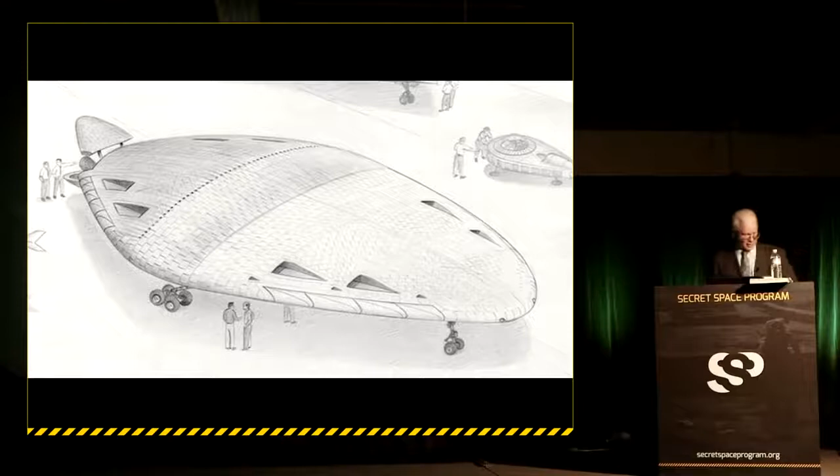Louder, please. Okay. Let's see here. Move this up a little bit. There we go. Is that good? Okay. Can you hear me now?

Okay. This is the first generation Aurora. It was a remotely piloted vehicle. It was built by Lockheed Martin. And this object you can see in the distance was actually taken from a Polaroid photograph that was taken in 1984 near Cedarville, California, up in the northeast corner of the state.

Now, this is one of the other vehicles here. This is a drawing put together by my friend Michael Schratt. This particular vehicle I'll go into a little bit as well. It was a part of a crash recovery in East Germany.

Now, after I got out of high school, I realized that in order to go to the... Okay, there we go. Sorry about that.

One of the things I was going to need to be able to do in order to go to the college I wanted to go to, which was a place called Art Center College of Design in Pasadena. I wanted to design cars for General Motors, and this was the premier college that all the designers would go to. And at $2 an hour minimum wage at the time, I knew that there was simply no way that I could afford to save up the money to go there. So I decided to join the Air Force and get the GI Bill to help pay for my college education.

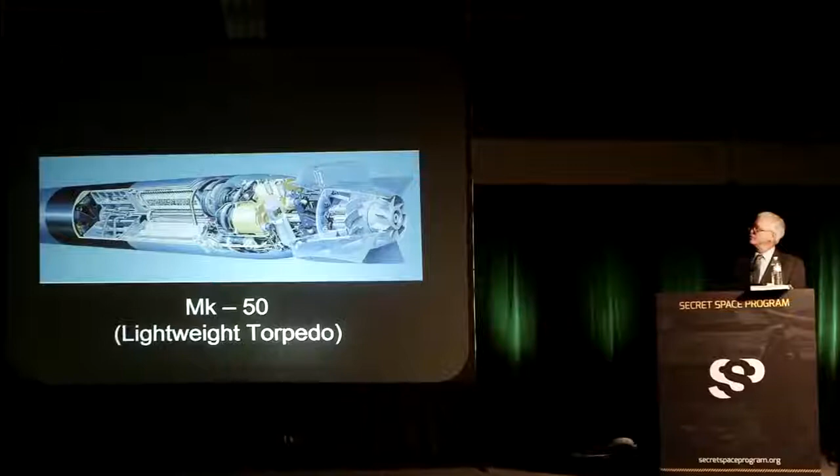This is a cutaway illustration of a propulsion system for a lightweight torpedo that basically involves a lithium core that is ignited once it drops into the water. And this heats up an oxidizer, flows through here, it creates steam, high temperature steam through these heat exchanging tubes here, goes through a transmission, drives a generator, and also a couple of counter-rotating props in the back.

But being able to figure all that stuff out, and I take a lot of pride in the accuracy of my work, involved a certain amount of engineering. And even though I'm not an engineer, I don't have an engineering degree, I spent an awful lot of time studying how things are put together, how they work, what makes them function, what the physics and the engineering are behind these systems.

But eventually, while I was working in the industry, I actually had the opportunity to make contact with a lot of people in the military, some of whom expressed an interest in having some of my artwork in their squadron ready rooms. And so I was actually able to arrange to get what are called media orientation rides and go up in these planes and see how the pilots handle the stress of flying.

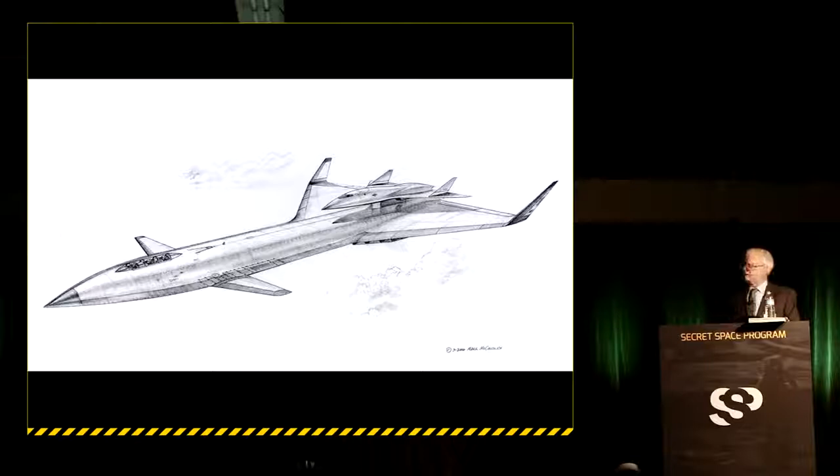It turns out that shortly after I submitted a sketch of this particular aircraft, they decided that they were just going to completely scrap that. And so I wound up doing an illustration of an aircraft something like this. There was one proposal where it might actually be possible to deploy this particular aircraft right out of the back end of a flying C-5A Galaxy. And this is sort of my conceptualizing of how many you could actually fit into a C-5, knowing what the size of this aircraft was.

It had a scramjet nacelle on the ventral surface, and it also had one on top. This particular version only had one underneath. And because of the shape of the aircraft, it made it very peculiar, or very sort of awkward, where the landing gear would come out in order for this thing to work properly.

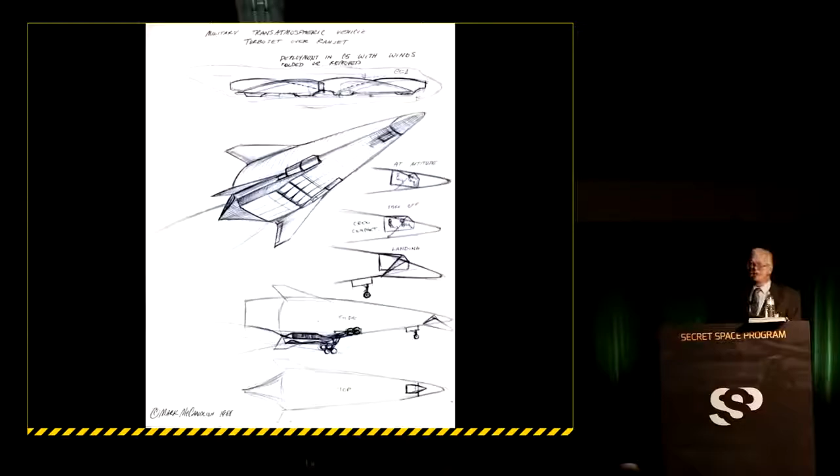Now, about the same time, there was a lot of talk about a crash, an aircraft vehicle crash that had occurred somewhere near Barstow, California. And there were some people that were describing different features of the aircraft. There was a fellow that I met and talked with who was friends with a number of the astronauts, and they were describing how there was a particular astronaut flying a Learjet, ferrying it from one location to another through the state of Nevada.

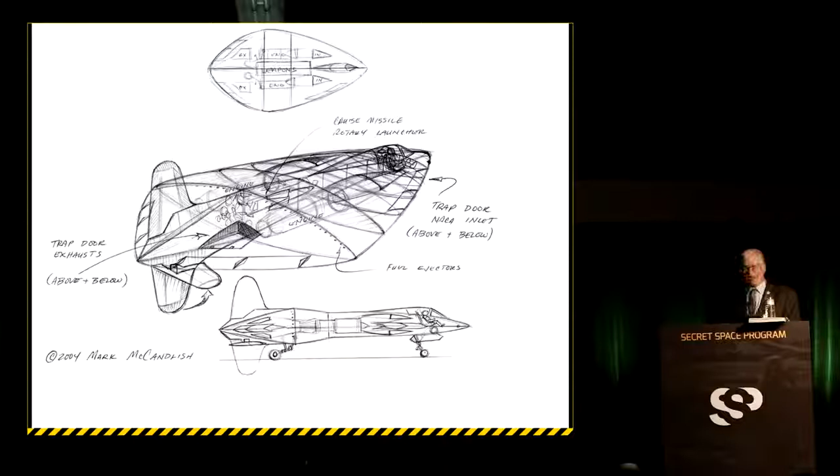And he came out of the clouds and he found himself sitting slightly above and behind an aircraft that looked just like this. Now, the interesting thing about this aircraft is that it had some very strange features. It had engines that were buried inside the fuselage with sort of a NACA duct-shaped inlet there. There was kind of a slot in the back. It looked like there was maybe a trap door, control surfaces along the bottom, exhaust diffusion.

But it also had this very interesting feature, and most people don't know this, that the predecessor of the SR-71 Blackbird, the YF-12A, which was kind of a strategic aircraft used for missile delivery, it also had a folding ventral vertical stabilizer, or tail as you would call it. And so this aircraft obviously had that same particular feature. The vehicle was all black, or sort of a deep gray.

And as the pilot was flying along, looking at this thing flying through the clouds, he suddenly realized that if he had not seen this thing directly, he might have collided with it as they were flying through the clouds together. So he gets on the radio to his ground control people and says, I've got some traffic up here, why didn't you warn me? And they said, well, there isn't any traffic up there. And he says, well, of course there is, I'm looking right at it. It's black, shaped like a flattened out football shape, no wings to speak of, two tails, one above, one below.

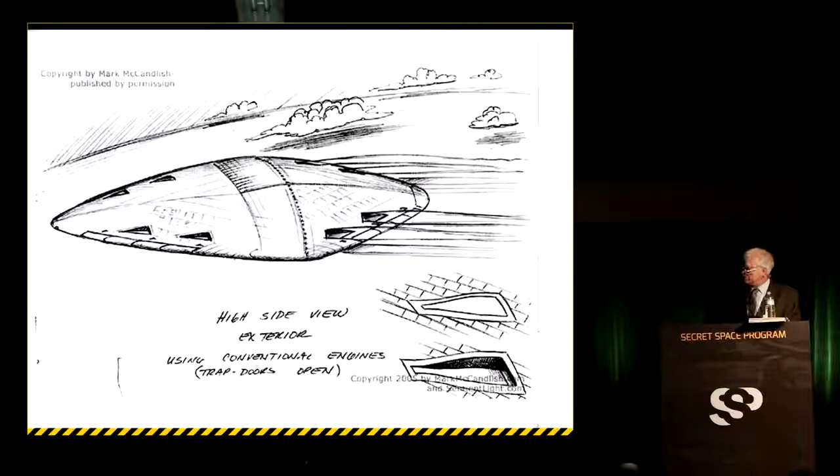And so he went through a lengthy debriefing about what he saw or what he shouldn't have seen regarding this particular aircraft type. Now, one of the things that this particular aircraft had that wasn't immediately available or immediately evident was a ridge that ran laterally across the widest part of the aircraft. And on that ridge were a number of what looked like fuel ejectors or fuel injectors pointing outward.

And this aircraft here was then being described within the industry as this vehicle that would produce an exhaust trail, the so-called donuts on a rope exhaust trail. That it seemed to imply that there were two different propulsion systems in use in the aircraft to get it up to speed. Nobody really understood what they were or what actually made the aircraft function in the way it did.

But as it happened, I was asked to do this painting for Popular Science on the so-called Mach 5 spy plane, and it went into details about all the seismic events in Southern California that sort of raised the curiosity of some of the people to watch what was going on. And I remember at the time, this was in the late 1980s, early 1990s,

that you could go out into the high desert of Southern California at night and you could see these things flying overhead, flying back and forth. When the sun was just below the horizon, it was dark out, but there was something still up there. You could see it moving and moving very quickly.

Now, about the time that I did that illustration for the magazine, I was contacted by a colleague, a friend that I went to college with, and I invited him to go to this air show at Norton Air Force Base in San Bernardino, California, which is about 75 miles east of Los Angeles. The Thunderbirds were going to fly, and it was a little bit of an overcast day, but in the end, I wasn't able to actually attend the air show, mostly because I had to complete another illustration for a client over the weekend.

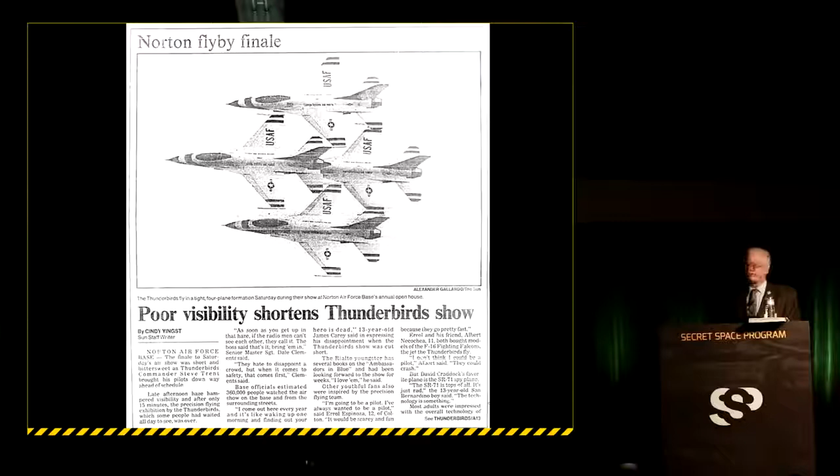Now, as they were going into the hangar, the gentleman turns to my friend and says he just realized that there are some aircraft on exhibit here that you're not cleared for, security-wise. You are not cleared to see these aircraft. So just enjoy the show, walk around, listen, take a look, but don't say anything to anybody.

So he goes in. I don't know how well you can see this because it came out kind of light, but there were two sections to this particular hangar on the inside. On the southern side, which would be over here, they had a number of aircraft, including the first generation Aurora, which I'll go into a little bit more here in a bit. They had the F-117A stealth fighter. They had the losing competitor in the advanced technology bomber competition, which led to the creation of the flying wing Northrop B-2 bomber, the Spirit. Also had a couple of odd little hovercraft.

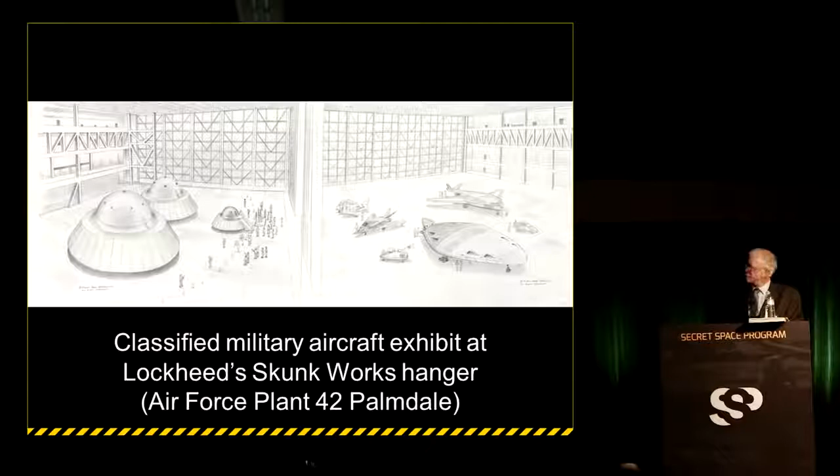Right here, this particular vehicle here, this is kind of a rough close-up. It was sort of an answer to, or a follow-up to, the A-10 Warthog, which was an anti-armor aircraft. It's a vehicle that carries a very big Gatling gun, fires thousands of rounds per minute, and is a very durable, very hard aircraft to take out of the sky. It's very heavily armored. Has a big gun that sits inside of it.

And so this aircraft here was designed with a very unusual kind of wing. Now, in aerodynamics, they have something called the Coanda effect. Basically, it involves blowing air across the surface of a wing to provide lift rather than just relying on the movement of the wing going through the air to provide that same lift. So the design of this aircraft was that they came up with a way of mounting the engines above and slightly ahead of the wing, and then they took this high-temperature alloy, it's like a flattened-out funnel shape really, that blows right over the wing.

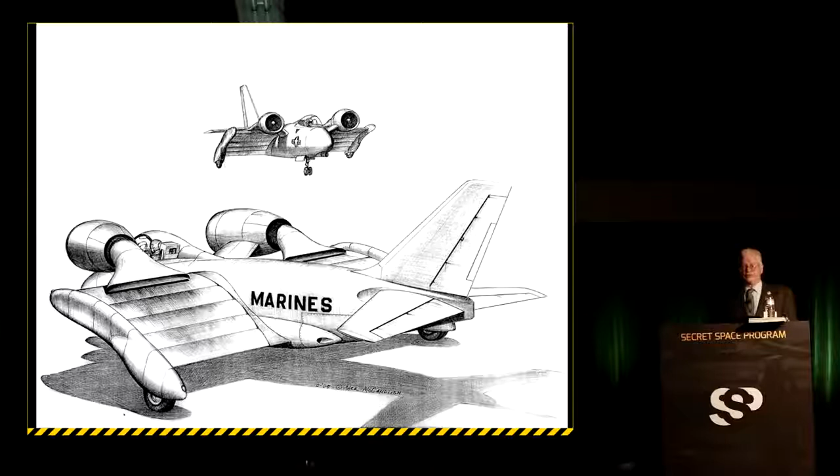And when the wings are all rotated in sequence, it forms a nice smooth ramp that the air can actually flow down. It goes from horizontal, following the surface of the wing with this Coanda effect, kind of an aerodynamic adhesion in a way. And so it redirects the thrust of the engine to a point where it's pointing almost straight down, right about where the center of gravity is for the aircraft. Now here's a computer-generated image that shows a little more detail of the same vehicle.

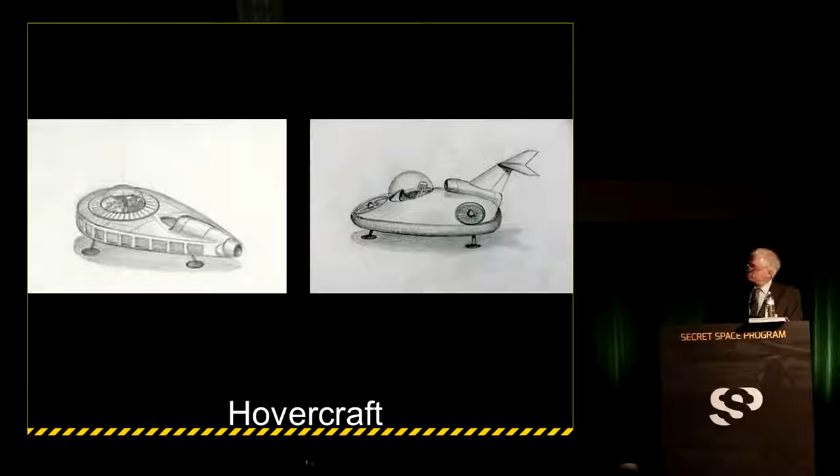The hovercraft were kind of unusual. There was one that had a jet engine in the tail of it, kind of a teardrop shape, and around the perimeter it had a series of little trapdoors that would open and close as the thing was flying along. And this jet engine also had a transmission that connected up to a set of counter-rotating turbine blades that surrounded what amounted to a bubble-type cockpit, almost like something you'd expect George Jetson to be flying in one of his little cartoons.

This one over here, I've actually seen a version very similar to this in one of the popular science magazines, where it had a turbine in the front and two in the back, one on either side, that were driven by this particular engine through a transmission of some kind. And it had the same sort of sphere-shaped cockpit too.

Now, Senior Peg was the code name they gave to the development of the advanced technology bomber, and this was Lockheed's version here. You can see it is kind of a derivation of the F-117A. It has the same kind of faceted surfaces, which help to reduce the radar cross-section, or the amount of radar that's reflected back to an antenna from a source inside enemy territory. It had flush inlets on either side of the cockpit with a screen over them to prevent the turbine blades from reflecting a lot of energy back out to a signal source.

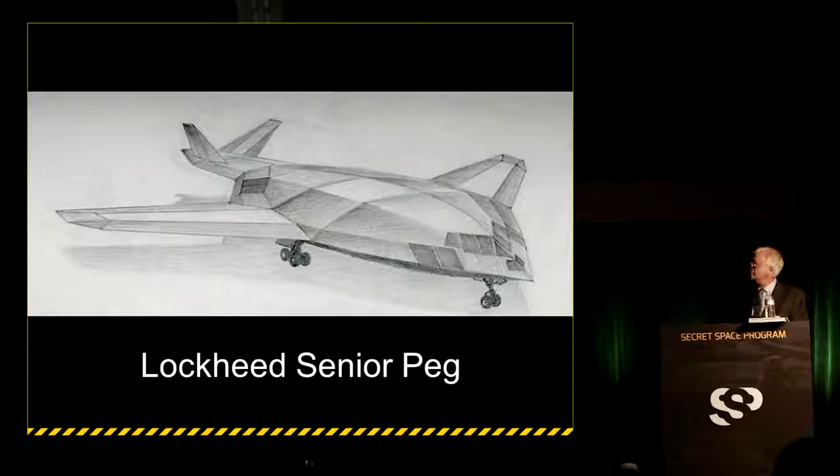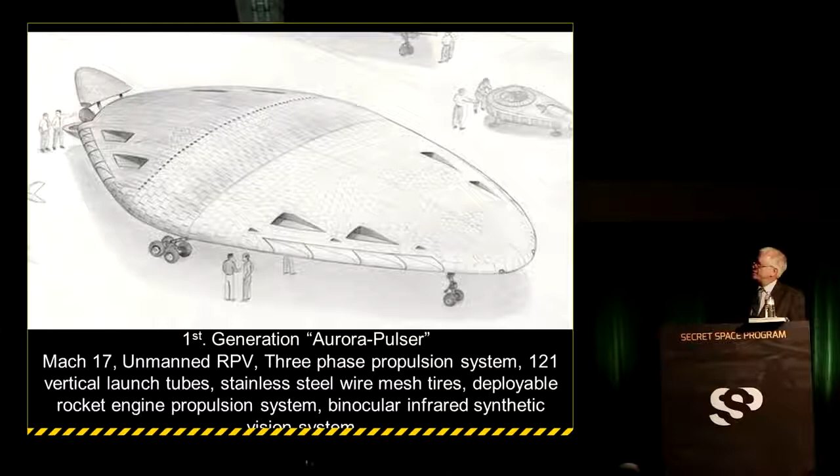But this here was one of the more interesting vehicles, and you can see some of the stats on it down below. This was probably one of the largest unmanned weapon systems built to that time. From my different sources in the military, this aircraft, known as the first generation Aurora, nicknamed the Pulser, was entirely covered with space shuttle tiles. You can see evidence of the tiles all around the surface of the aircraft. And just like the aircraft I showed you earlier that had the tail above and below the fuselage, this aircraft had NACA duct style inlets for 4 engines and 4 exhausts, both on the top and on the ventral surface, or the belly, of the aircraft.

In fact, after I had discussed this particular weapon system on Coast to Coast with one of the hosts that was working that particular program, I received email from a number of sources indicating that there were inlets and exhaust ports both on the top surface and on the ventral surface. Now, at the time of the exhibit, my friend said he could only see the underside of the aircraft. He couldn't see the top of it because it sat kind of high off the ground. And so he didn't know whether there were 8 exhaust ports or only 4.

And it turned out that one of the people I corresponded with after doing the radio program said that they had been jogging late at night during an evening when an aircraft like this was leaving one of the United States Air Force bases in Great Britain.

And he said that what was unusual about the aircraft is that when it went to take off and it lit up the afterburners, which dumps a lot of extra fuel into the exhaust stream, you see this sort of a bluish glow coming out of the exhaust. He said there were 8 ports, which of course helps to point out that you have 4 above and 4 below. So we knew that was true.

One of the things that was interesting about this aircraft was that it had that same system of these exhaust, or I should say fuel ejectors, on not only the top surface right along this ridge, but also on the ventral surface on the underside as well. So here we have 2 different propulsion systems incorporated into one aircraft.

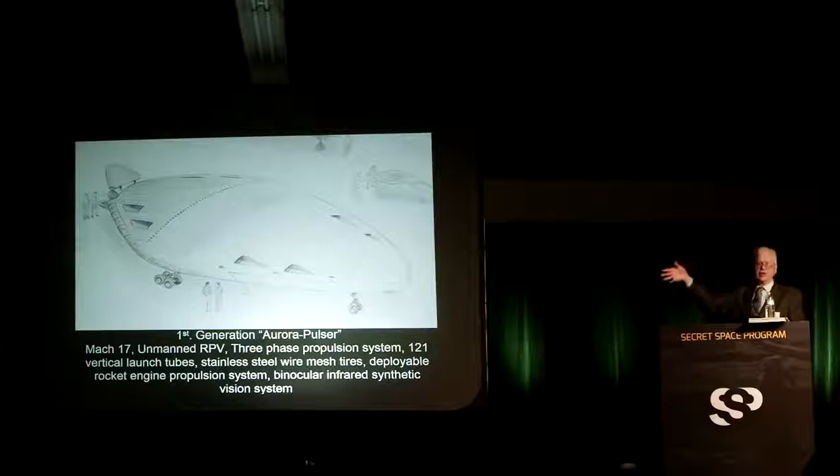And once it did, then of course it could continue onward using a rocket engine, which of course provides its own oxygen and fuel. Since you're outside the atmosphere, you don't have any air you can breathe or use in the combustion reaction.

And so one of the things that helped illustrate that this aircraft was not only being used, but probably in deployment, was the fact that all along the trailing edge of this aircraft, in this area here, these heat ablative tiles that were on the tail end of this aircraft were all highly eroded from the pressure and the temperatures of the exhaust and the fuel that's being burned. Now, they say that it might have been slush hydrogen, it might have been liquid methane. I don't really know for sure.

But the one thing that's also notable is that it had a synthetic vision system up in the front. It had a pair of infrared cameras. And these 2 cameras would actually allow a pilot sitting on the ground, and I've been told that this remotely piloted station was at Indian Springs Air Force Base near Las Vegas, Nevada. But the pilot could sit at the controls of the aircraft as though he was actually in the aircraft.

And he would wear a special helmet that would have a kind of heads-up display in it that would give him a left eye and a right eye view of what the surrounding terrain was. And it was all in infrared. So this would permit him the opportunity to see where he was going, even to take off and to land the aircraft without actually being in the aircraft itself.

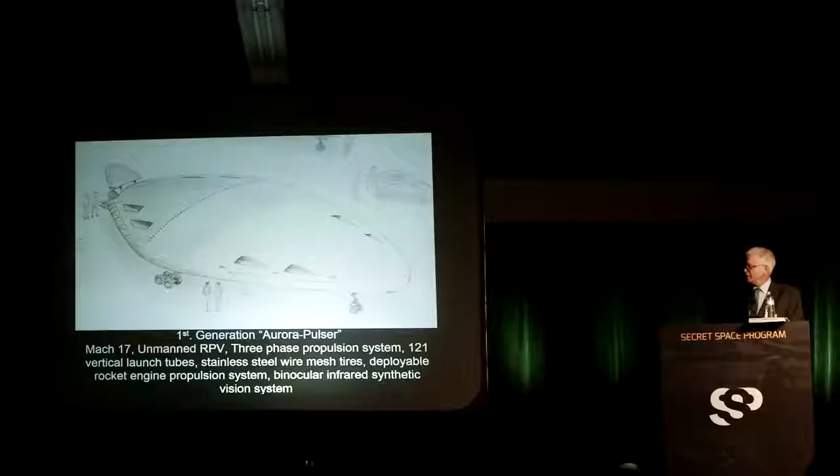The way the system would work was remarkably simple. It had a kind of tile with explosive bolts holding it in place on the outer skin, and sitting up behind it, the weapon would be held in place. And it's not shown in this thing, but I've subsequently learned that there was kind of a 3-piece fiberglass sabot which would hold the weapon straight in the bore, so it would always be pointing a certain direction.

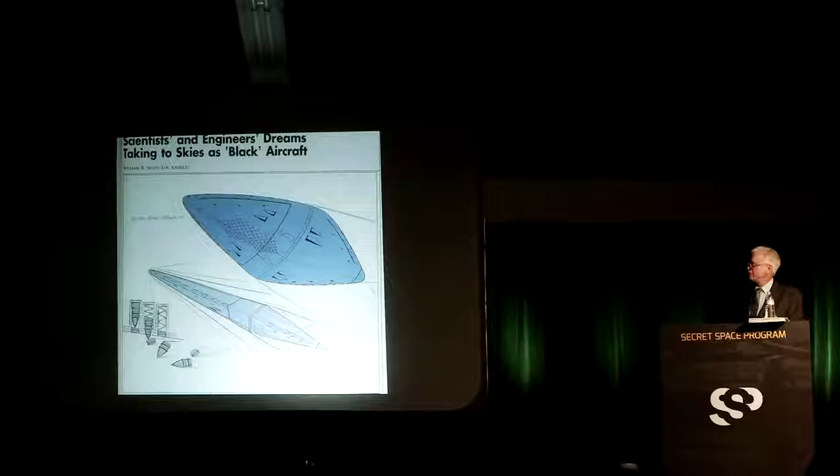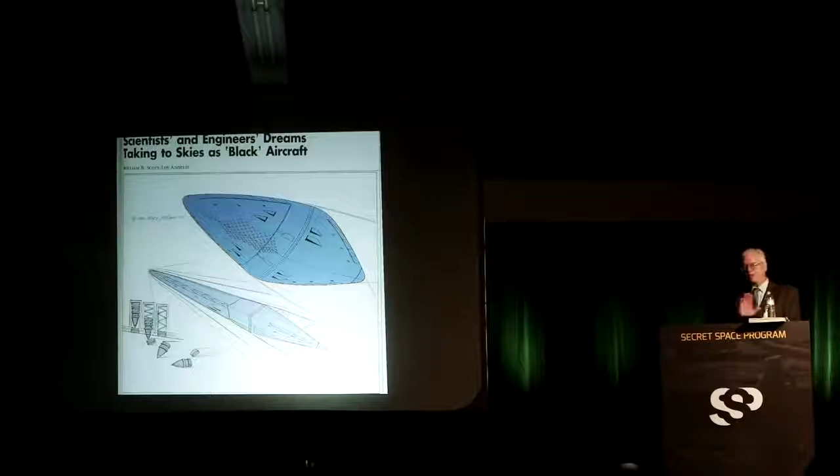But the ingenious and simple aspect of this thing was that when the explosive bolts on the outside were ignited, the tile would disintegrate and blow away. And when it did, there was a big coiled spring about 12 inches in diameter behind the vehicle that would push it out of the hole. And right behind the reentry vehicle was another tile that would slam down into place and cover up that hole again, almost like in a tenth of a second.

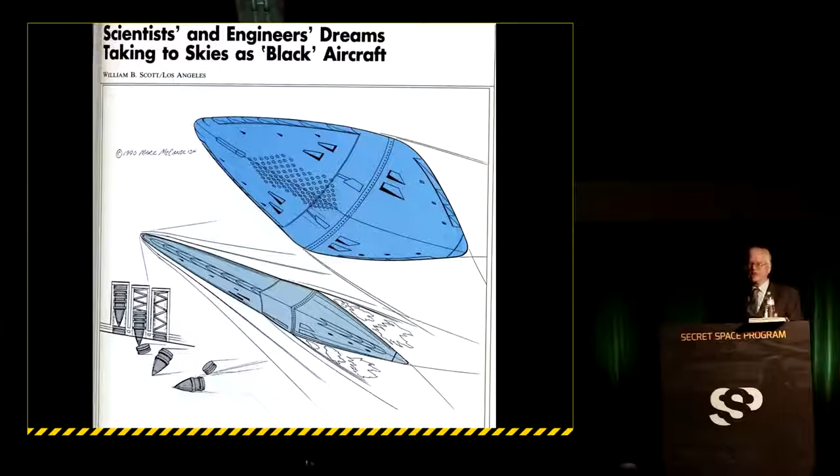The reentry vehicle, let's see, where are we? Right there, would then stabilize, because of its center of gravity weights and the shape of it, would stabilize in the airstream, go into the atmosphere, and be able to acquire its target and do its job.

Now, further verification of the existence of this aircraft came from Jane's Defense Weekly, part of their intelligence briefing newspaper. And this was apparently an artist's rendition of what the same kind of aircraft, if it had been built by McDonnell Douglas, would have looked like. And so you can see that there's the same sort of ridge running laterally across the flattened football shape, exhaust coming out the back, and some other ports that suggest there's an internal system of engines as well. So it reflects the same sort of design philosophy, even though the manufacturer was different.

One of the things that this particular aircraft would do, if you look at the ridge here where these fuel ejectors were located, would expel the fuel, and the fuel would be ignited by just the intense pressure and heat of the air flowing across the front of the aircraft. Now, one of the things the artist did not capture in this particular view was the fact that the front end of this thing is going through the air so fast that it's glowing red hot, just because of the velocity, the friction going through the air at such a high speed.

And so as that air is further compressed as it comes up on this ridge right here, it meets with the fuel. As the fuel is sprayed into the airstream, it spontaneously combusts. But by this time, the aircraft is already going well above Mach 1. So there's a supersonic shock wave that forms and basically separates,

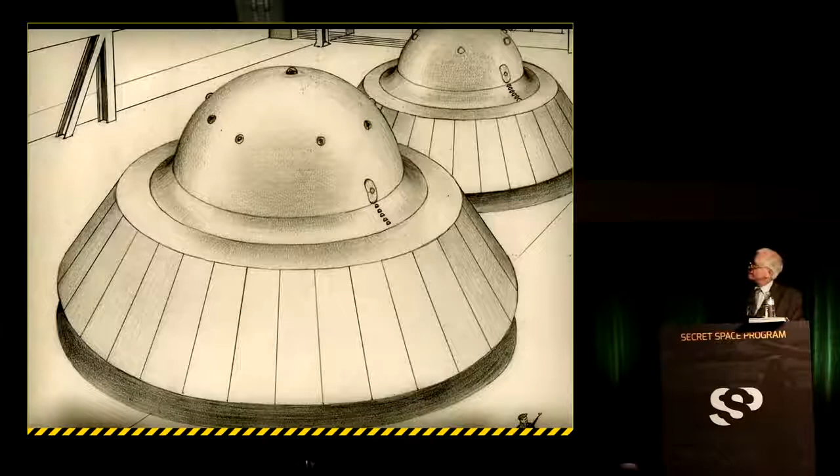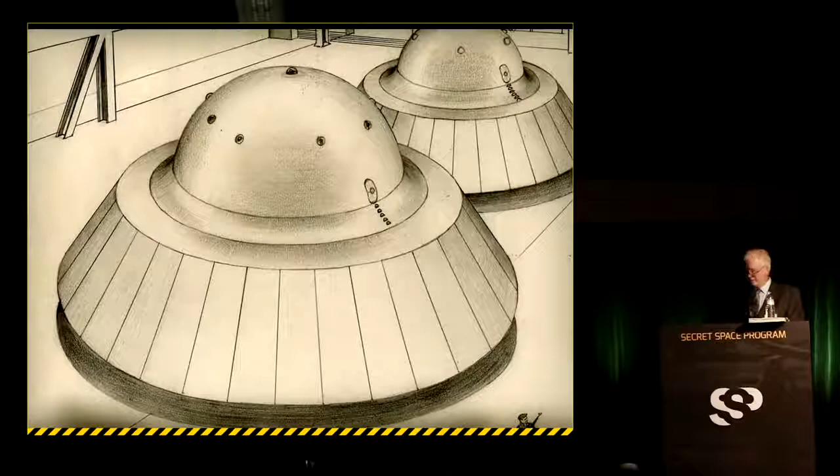The synthetic vision system, which involved a number of cameras on the outside. This is the 60-foot version here. This one here was somewhere between 120 and 150 feet in diameter at the bottom, right down there. So one of the things that tells you is that whatever the technology is that's running this thing, whatever makes it work, is scalable. That is to say, you can make a little one or a big one, but without too many different adjustments in the technology, you can actually make this thing work the same way on a small scale as it will on a large scale.

Now, ultimately, I wound up producing a cutaway illustration that was based on what the eyewitness told me about what he'd seen. And he was very specific. I mean, this is a young man who's an outstanding designer. He has the ability to kind of look at things and remember what he's seen, almost like a photographic memory. And so he was able to rattle off the dimensions of all the different components in the system.

He described a capacitor array in the bottom that had stacks of 8 individual copper-colored plates, and they had a series that went all the way around this vehicle, that were so many inches wide, something like 12 to 14 inches wide at the outer edge, that they were embedded in a kind of a glass-like substance, maybe a quartz or some kind of a high dielectric resin of some kind.

There was a little robotic arm that could extend out through doors that would open on the side. There were oxygen tanks. But the thing that was really interesting about the vehicle was that everything on the vehicle was made of synthetic material. There was really very little metal used in the construction of this vehicle. The sides were made of a composite material, something like carbon or Kevlar.

The entire crew compartment was a big sphere. And this sphere was what you would call a pultruded component. Pultrusion is a process where you take a shape, in this case, a sphere.

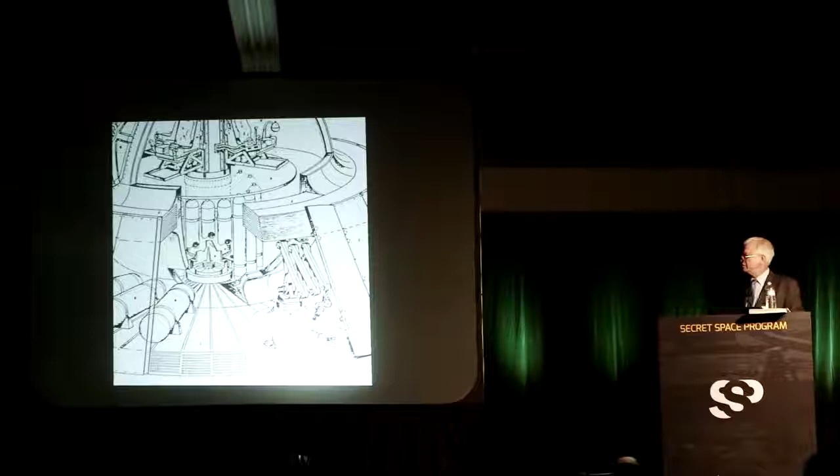The plates in each stack were staggered in such a way that the gaps on one lined up with the plates on the other. Now there's a significance there, because if you map this out on a piece of paper, you see very clearly that if you had something a 1/16 of an inch thick, you could slide it in between, so that with the gap that's between this thing here, if you had a laser beam like this thing I'm carrying right here in my hand, and you shined it through this material, it would be able to filter through all the gaps because of the way that these plates are aligned.

And so I began to look at other things that might be happening, other phenomena. It also occurred to me that what was really strange about the coils is that normally, if you're going to be talking about an electrical circuit that uses millions of volts of electricity, you want to use wire that has many strands that are twisted together so it can conduct more current.

Now, part of the reason for that is that if you know anything about physics, you know that electrons are all negatively charged. And you can't really bring them together, except in the instance of superconductors, because like charges repel. And so when you have a conductor and the electrons are basically jumping from one atom to the next as the pulse of electricity is flowing through the conducting material, the electrons tend to repel one another, so they all migrate out to the surface of the conductor.

So if you have, as in this instance here, coils of single filament copper wire, or at least what appears to be single filament copper wire, running through this quartz-like material without multiple strands to conduct more electricity, it just seems like a contradiction. And so I began wondering if, in fact, this wasn't just copper wire, it was copper tubing, and that there was something else on the inside of the copper tubing.

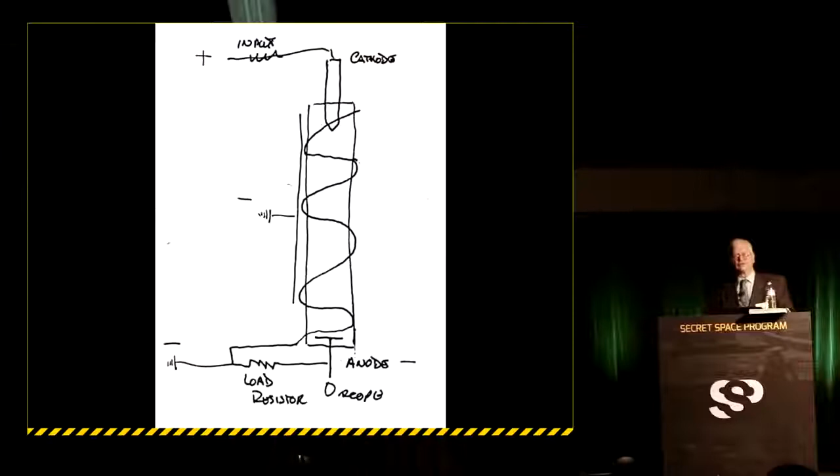And he had done a lot of research into something called zero-point energy. Zero-point energy, as a technical term in the physics literature, is quantum zero-point fluctuations of the vacuum. Now, the discovery of zero-point energy was made probably back around the end of the 1800s, early 1900s. They were beginning to experiment with cryogenic fluids, taking a gas like nitrogen or oxygen and compressing it down to the point where it actually became a liquid, became super cold, hundreds of degrees below zero.

And the research they were doing was trying to find out what the actual temperature was of absolute zero. And by absolute zero, I mean that there's no warmth left in the material. There's no Brownian motion, no movement where the individual atoms or molecules are vibrating, bouncing around. And they found that even when they got down to almost absolute zero, there was still this kind of vibration in the material.

The German physicist Max Planck called it Zitterbewegung, which means jiggle. And so they determined that this jiggle was a kind of electrical charge that was embedded in the fabric of space-time, and that's where the name comes from, zero-point energy, looking for zero energy.

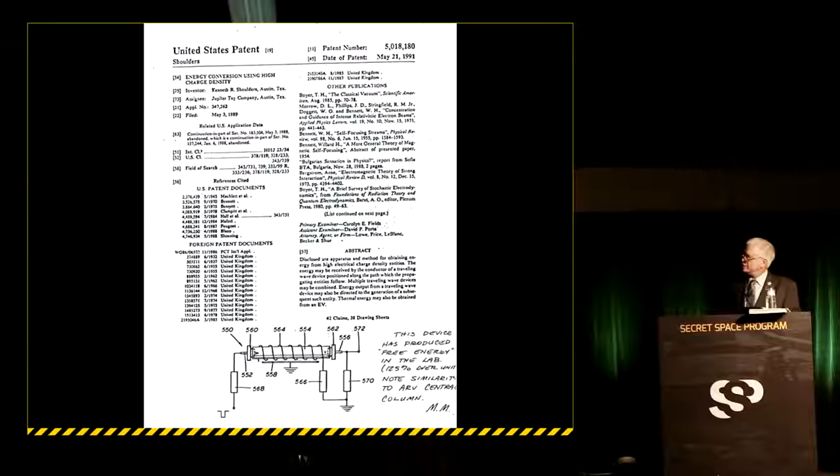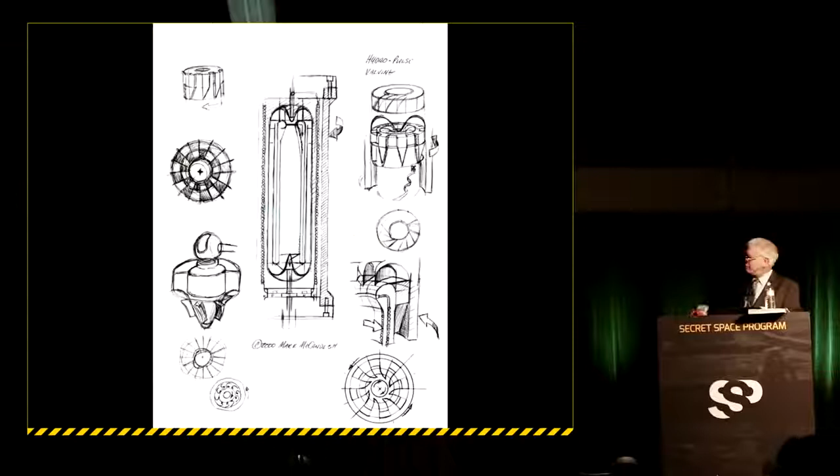And yet, I looked for other possibilities as well. The possibility that we had something like an anti-proton trap going on here, where you have the same kind of coils going around the outside, a central column, a way of trapping antimatter. I thought that this might be something like the so-called antimatter drive that was used in some of the Star Trek vehicles. So I began conceptualizing, looking at different ways that you could actually make this system work.

Now, somewhere in the late 1990s, early 2000s, I came across a number of books. Joseph P. Farrell, who's another one of the speakers here, had found some historical records after the Second World War that described a device that was being worked on by the Nazis in the Wenceslas mine up in southern Poland, called the Nazi Bell Project, or Die Glocke.

Now, that particular system, based on the documents that were found, was made up of a pair of counter-rotating cylinders, one inside the other, with a coil that went around the outside. And electricity was being fired through the system. So I started looking at ways that you can make that work.

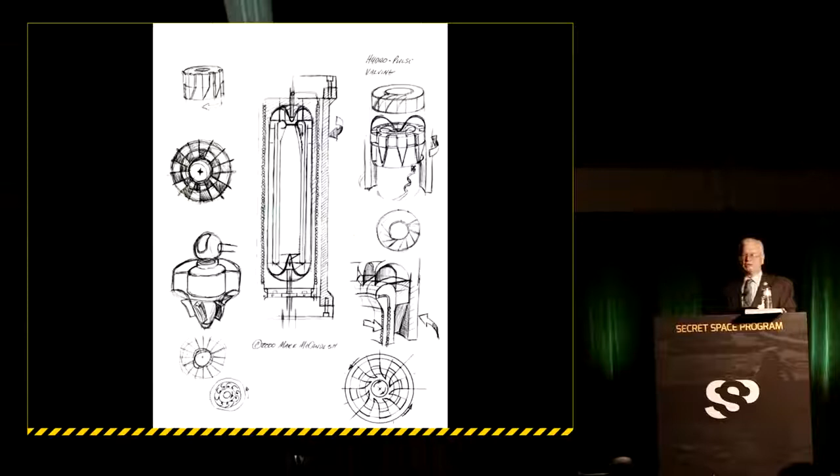Now, the first thing I thought of was that if you put a lot of electricity in this thing and you have big coils around it, you may wind up in a situation where you can't get an electrical motor to actually drive the system unless you had a pulley system sitting way off to the side, away from the electromagnetic fields that would interfere with its operation.

But I found out that, of course, mercury has some interesting characteristics. I think there's something referred to as the nuclear spin ratio. The particles in the nucleus of the atom of mercury and the electron shells, there's a spin ratio of something like 60 to 2. And bismuth, by the way, also has the same kind of property. So I thought it was interesting that these two materials had these unusual characteristics that might make them very important in the operation of this kind of thing.

But what I found was that it goes all the way back to Michael Faraday, and the first electrical motor was really just a puddle of mercury with a permanent magnet sitting in the middle of it in a petri dish. He had a little scaffold off to one side with a copper conductor, and he put one wire into the mercury, sent it over to the battery. Another wire would hang down from the top of this little scaffold. And the minute you connected the circuit, the mercury would begin circulating around inside the petri dish, around this magnetic field.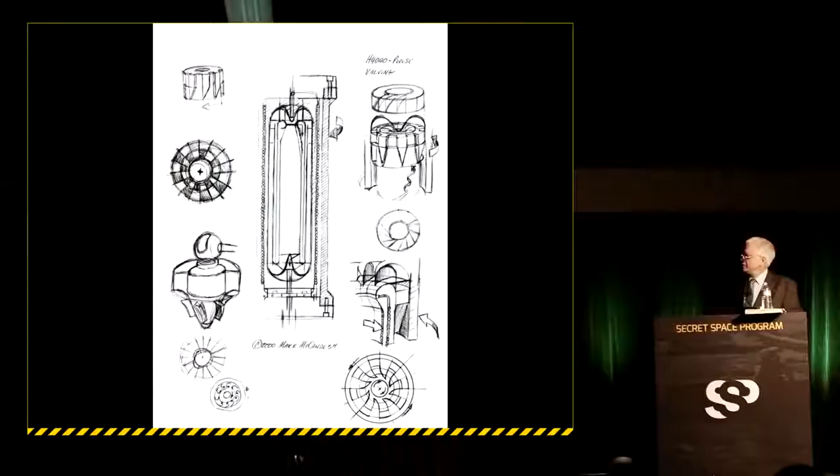And so if you look at the way the field lines are set up in this particular vehicle here, you can see that the field lines basically go out around the outside and stroke down through the middle. That's what they do. So by setting the system up the way it has been, you already have the built-in mechanism to make this thing rotate on the inside, just like Michael Faraday's little motor from back in the 1820s, I think it was.

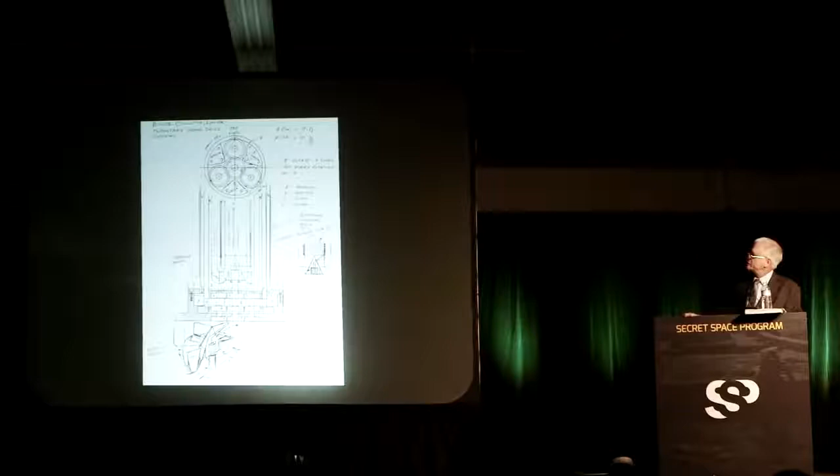But the other thing I realized was that you're going to need some way of circulating the mercury. So in one of the instances where I was looking at ways to mechanically do this, and to get this counter-rotation going that was described in some of the papers from the Nazis' experiment, I was creating a kind of planetary gear drive system that would sit either at the top or the bottom, so that as one of the cylinders is turning one way, the gears would force the other cylinder to turn in the opposite direction.

And the benefit of doing something like this is that when you have things turning in opposite directions or sliding across one another, you get this vorticular motion in the mercury. And it seemed to me that that vorticular motion was something that would be very significant, very important to the operation of the system. And it's all leading up to the tapping of zero-point energy, which I'm going to get into here shortly.

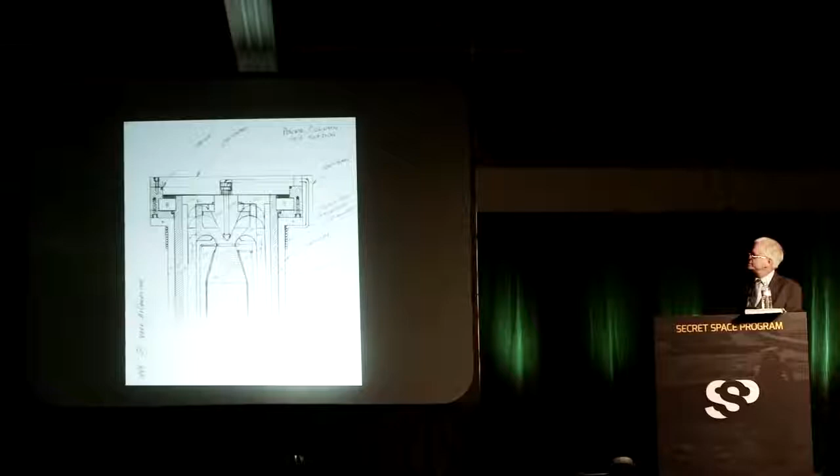But the idea was that the mercury would come up in the gap between the two cylinders, reach the top, and be forced down through this venturi, this little funnel-shaped opening in the bottom. You'd have your cathode up here at the top, and a ring embedded in the quartz of the interior cylinder. This is the other cylinder on the inside here. And you'd have coils inside so that as the mercury was being charged with electricity, it would cause the mercury to circulate. But because the cylinders are turning in opposite directions, you get this natural tornado-like vortex formation in the movement of the mercury through the system.

Now, the next thing that I did, it's not as easy to see in this particular diagram. I wonder if the next diagram has, here's a little bit better way to see it, down here in the corner. You see the mercury comes up here, and it goes down through this opening. And then right below that second electrode that's shaped like a ring, you get the electricity jumping from there to there as the mercury is being pumped through by the natural flow caused by the electricity going through it.

A sudden discharge of electricity goes through the mercury, and the mercury is spinning the whole time. It's spinning like a tornado. You send the electricity through it, and when you do, it creates a phenomenon that's very similar to when a smoker blows a smoke ring.

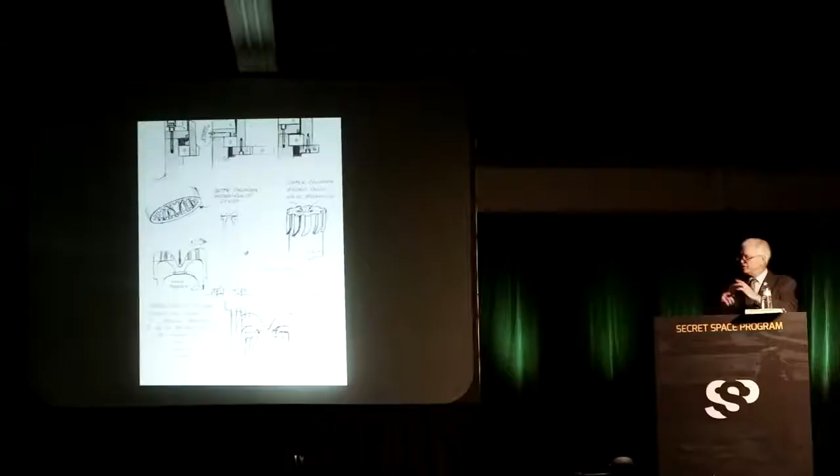And if you've ever studied a smoke ring, you can see that it's caused by a sudden discharge of the smoke from the lips of the smoker, and the surrounding still air slows down the outer edge of the smoke as it's being expelled. So it creates a self-stabilizing event where the smoke forms a perfect ring. Even dolphins can do this with the air blown out of their blowhole. Now, the other thing is that you find this phenomenon is moving downward at probably something approaching supersonic speeds down through this central column here.

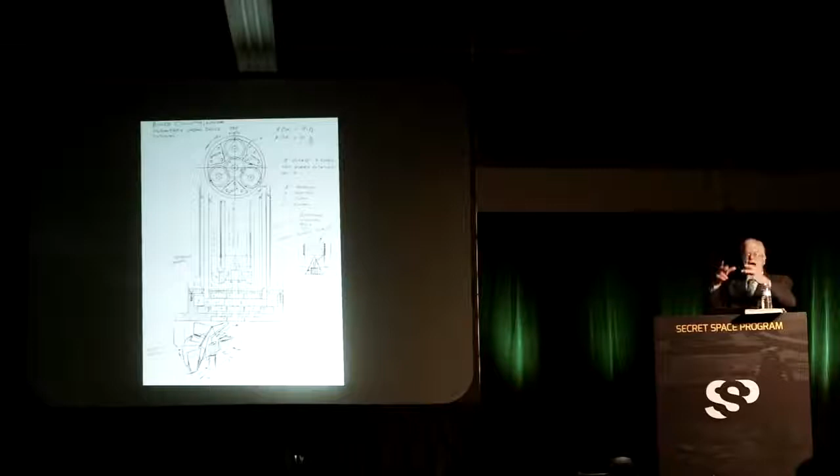There we go, down through the center, right there. Because of the rotation of the device, not only is it creating a kind of a smoke ring of ions, highly charged ions that are blowing down through the center of this device, but you also have a precessing, a rotating around a horizontal axis and a vertical axis, so that you have this twisting motion that goes on.

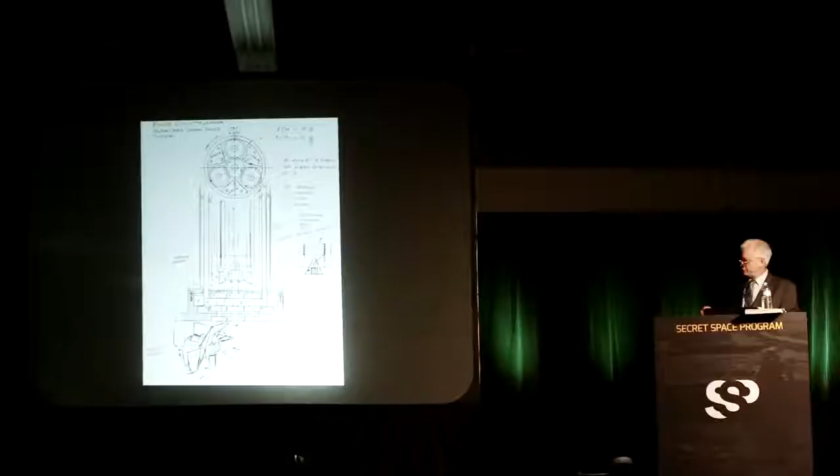And so what it winds up simulating is ball lightning, which is a naturally occurring phenomenon. It's noted for its ability to sort of be self-sustaining. It creates its own electromagnetic field. So in the process, what I really think that I've sort of stumbled across is a way in which this system here has three different electromagnetic fields.

It has the one created by the primary windings of the Tesla coil. It has the windings in the center that also create their electromagnetic field. But then that plasma ring, or I should say a sort of low temperature plasma-like phenomenon, or a virtual plasma, fires down through the center, and it also creates its own set of electromagnetic field lines.

And so what happens is you have an effect that's very similar to the electromagnetic pulse that occurs when a nuclear bomb goes off. Well, they actually have a weapon. It's called the explosively pumped electromagnetic pulse weapon. And it does the same thing. It combines overlapping electromagnetic field lines, and then using explosives, it pinches all those magnetic field lines, and it creates a powerful pulse.

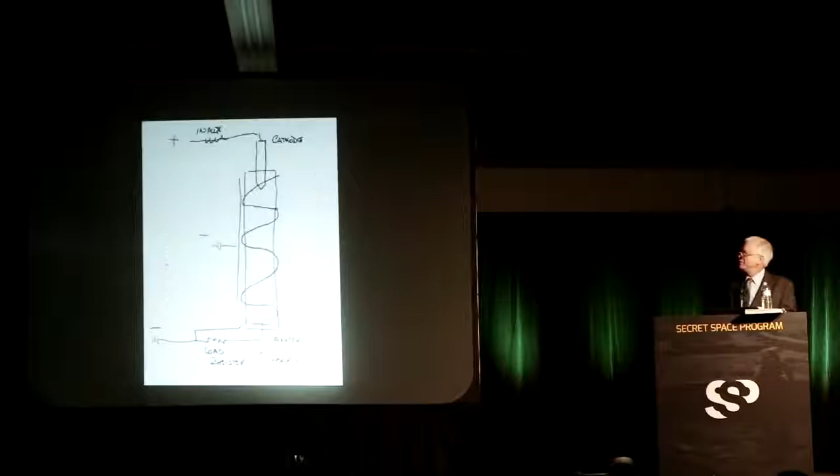And so what I'm suggesting to you is that process actually forms a kind of a doorway for tapping into this zero-point energy. Now, why is that significant? Why does that mean anything? Well, part of the reason is that when this device taps into zero-point energy, they've shown that zero-point energy is actually responsible for the effect of gravity, for inertia, and for mass.

And so if you're pulling some of that energy out of the environment, even though there's an infinite amount, some of the latest figures are 10 to the 109th power joules per cubic centimeter. That's a monstrous amount of energy. That's enough energy that if you took all of the energy in this amount of space-time and were able to tap it, it would be able to boil off the oceans of the entire planet. So you can see how this technology makes a hydrogen bomb look like a firecracker.

That's probably one of the reasons why there's such a tremendous effort to suppress it, because in the wrong hands, obviously, it could be weaponized and be very dangerous. But if used in peaceful ways, it provides you a tremendous amount of power. And when pulling this energy out of the environment, it's my belief that there is a moment in time where it doesn't allow that zero-point energy to interact with the atomic structure of the vehicle. Now, this interaction is what is referred to as the creation of mass.

For example, Einstein said you can never travel faster than the speed of light because as you accelerate through space-time, your interaction with the zero-point energy that's embedded in space-time raises your mass. And so it makes it harder and harder for you to go faster and faster, so you can never really reach the speed of light. In fact, he said that as you approach the speed of light, your mass would become near infinite.

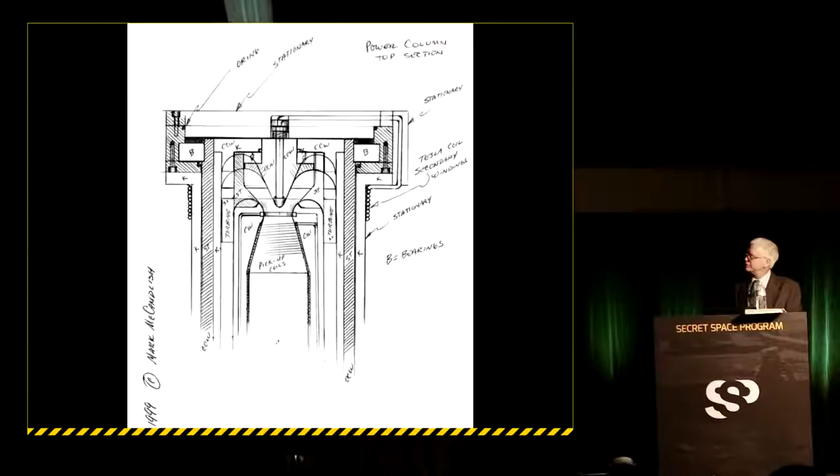So anyway, I'm running out of time here, and so I should probably show you a couple of the other things that I was going to talk to. Now, that thing that you can barely see, and this is the original Polaroid photograph taken in 1984. This was taken near Cedarville, California. This is a close-up. This is probably the only photograph in existence of what may have been the first string of vehicles used in what was called Solar Warden.

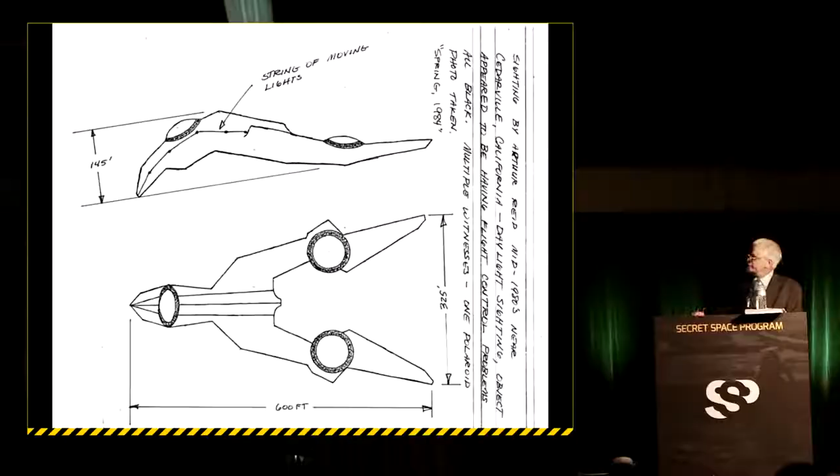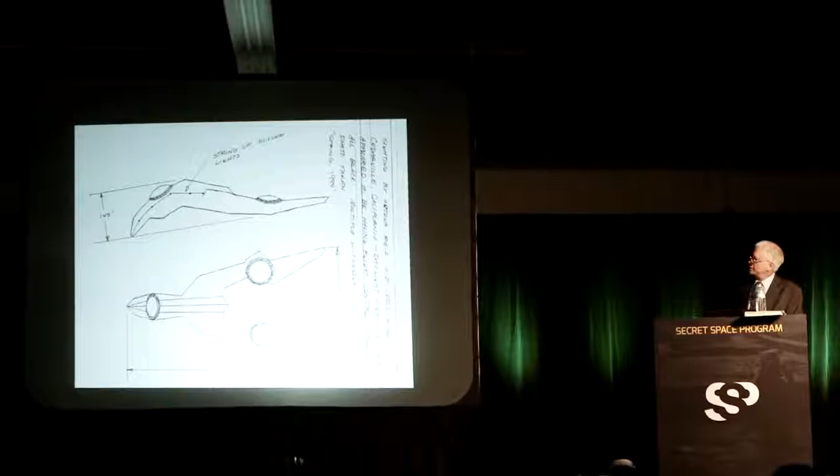Now, under a loupe looking at the original Polaroid, you can actually see a little bit more detail. This was a drawing done by the eyewitness, the fellow who took the photograph. And there were some things about it that I could probably go into, but the thing that's important to remember is that some of the features look remarkably like some of the structure on the so-called alien reproduction vehicle. And in fact, it did seem apparent to him that these wingtips, if you want to call them that, could actually rotate inward so that this thing would actually become more of a triangular shape, which also, of course, would help with issues like storage.

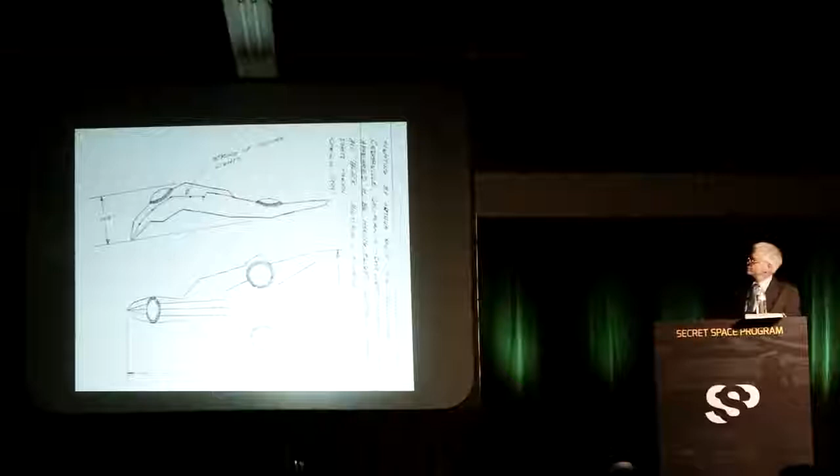Now, this is a little bit more detailed drawing that I did based on what I could see through the loupe. Actually looks like there may be some ways in which this area and this area here can be articulated so the thing can kind of fold itself up for storage or for putting it into a hangar.

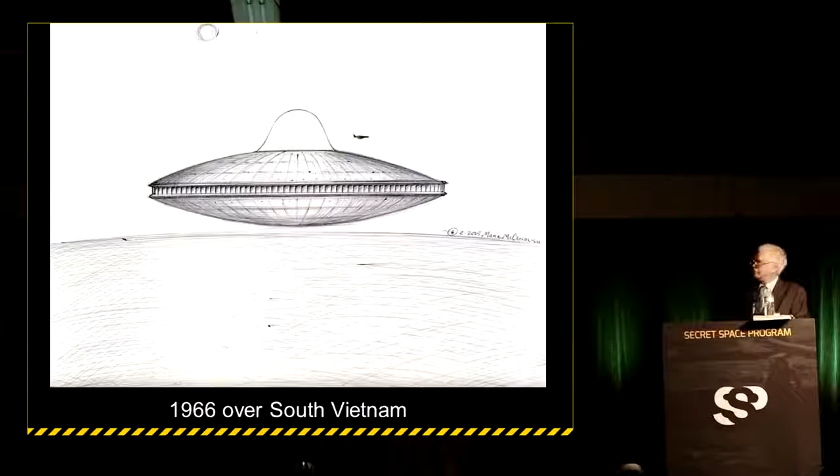Now, there's a lot of other incidents, eyewitness testimony, pilots that I've spoken to. This particular image refers to a sighting that occurred back in the mid-60s on the way back to Vietnam. That aircraft right there is a B-52, which is a huge aircraft. They said that this vehicle had a translucent illuminated dome that they counted 27 stories in there, and that was kind of how they helped to gauge the size of the thing. But he said that each one of the turbine blades, these are rotating turbine blades around the perimeter here, each one of them was the size of a bypass door on a huge hangar.

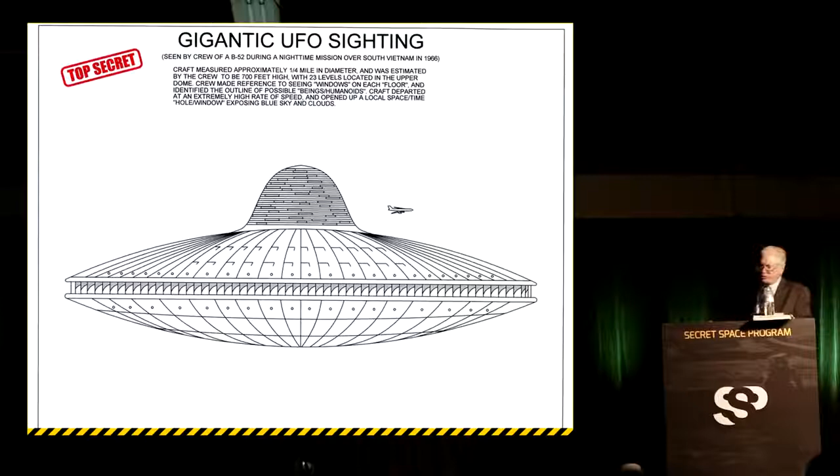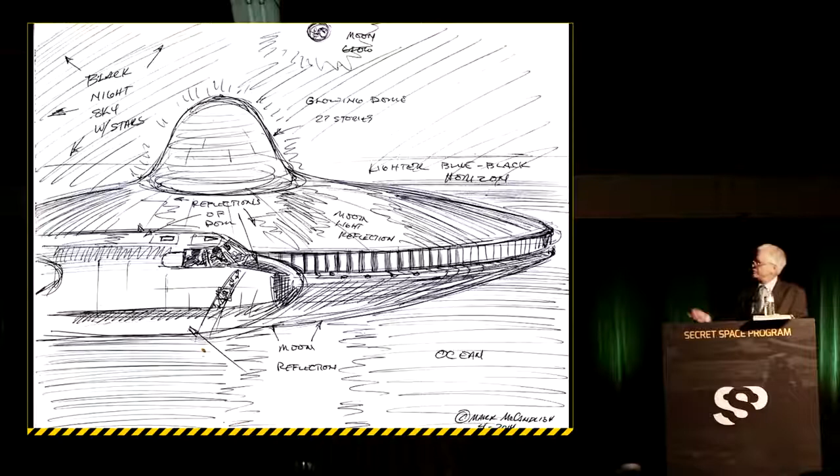And so one of the things that was significant about this particular encounter, this is kind of based on an eyewitness, it's just a rough sketch here, but this was taking place at night over the ocean at 1 o'clock in the morning, no clouds, just the moon. And when this aircraft actually, this large disc, which they estimated to be a minimum of 1/4 of a mile in diameter, when this thing departed, as it went out through the blackness in the sky, in its wake was this turbulent, shimmering image of what looked like a blue, daylit sky with clouds.

So what seemed apparent to the people, the crew of this B-52, was that when this thing created a wormhole, there was actually kind of an image dragging that would go along with it, that it would either show you where it was going to or you'd see some of where it had come from. Now, I've personally witnessed that on at least 2 occasions. And very often you find that these types of events are very mystifying and hard to understand because you don't readily understand what it is you're looking at.

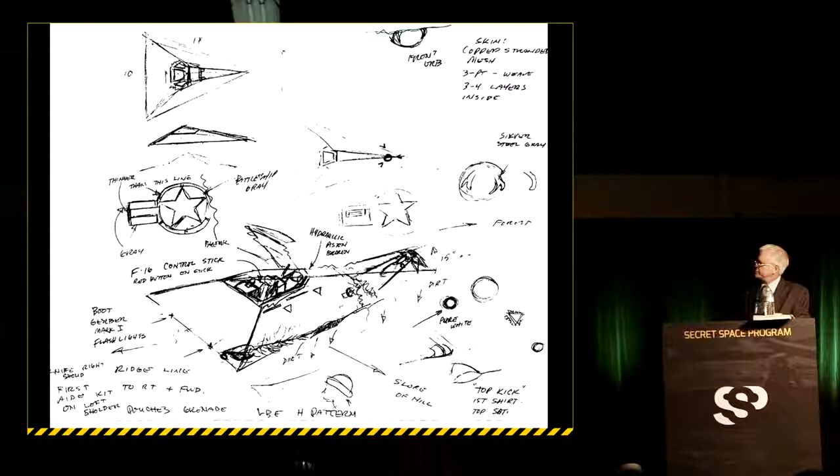The canopy on this thing had a lot of the same kind of details that you would see on the stealth fighter. You had the same sort of jagged edges, same sort of features that would help to defeat radar reflection, things of that nature. This is a sort of a mechanical 3-view drawing that was done by my friend and colleague Michael Schratt, who I owe a lot to for helping me put this presentation together.

But what was interesting about this particular vehicle was that it had these spheres that appeared to be made of a white ceramic material, like a superconducting ceramic, like yttrium barium copper oxide. When the vehicle crashed, the pilot hit a tree coming over a ridge line and then tried to pull the nose up. He hit tail first, and when he hit tail first, it broke the tail in half, and it released one of these spheres.

And that sphere looked pretty much like this. It had a couple of wires coming out of the top. There was sort of like a little circular opening there with sort of a metallic thing in the middle. But it had this beautiful sort of pumpkin shape with this sort of scalloped appearance.

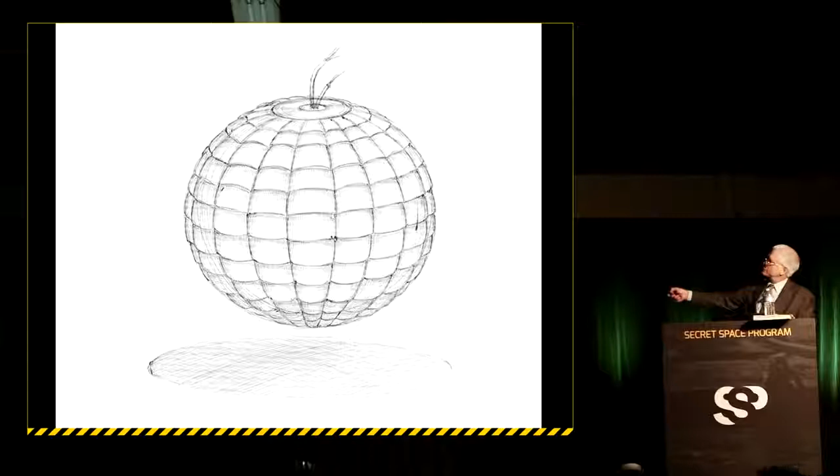And he said that when the thing was bobbing around the field and they were trying to recover this thing, every once in a while it began to spin and wobble and get a little faster, and then sparks would jump across the two wires that were exposed, and it would slow down. It would start to calm down again. They were given an aluminum utility case to try and capture this thing. They were told not to touch it with their bare hands.

So there's two reasons I can think of. One, either they're using cryogenic fluids and it's really, really cold, and they might get a burn, or they might get electrical shock, which seemed pretty apparent. But the thing was floating above the ground.

So one of the things we know about superconducting materials, and I'm thinking of this in the context of a propulsive system, but if you've ever seen any of the films on YouTube or on the internet of superconducting wafers floating above magnets, is they have to be set, as it's referred to, in situ, in order to create that levitating effect. In other words, you have to chill that ceramic material down right at the spacing that you want to establish between the magnets and the object itself.

So it'll maintain that attitude. You can crank it to a certain attitude and it'll maintain that attitude, and you can move it around, but it'll always stay in that one reference angle. So I started thinking that if this thing is filled with some kind of cryogenic fluid, and this is some kind of high temperature superconducting material or ceramic material on the outside here, the scalloping may actually create a kind of turbulence pattern on the inside that helps to stir it up.

And one of the things we know about superconducting materials is that when they get anywhere near moving magnetic fields, they produce a lot of electricity. And that electricity, unlike normal conductors, which will cause the energy to bleed off, superconductors tend to hold that charge. They tend to hold it for a while.

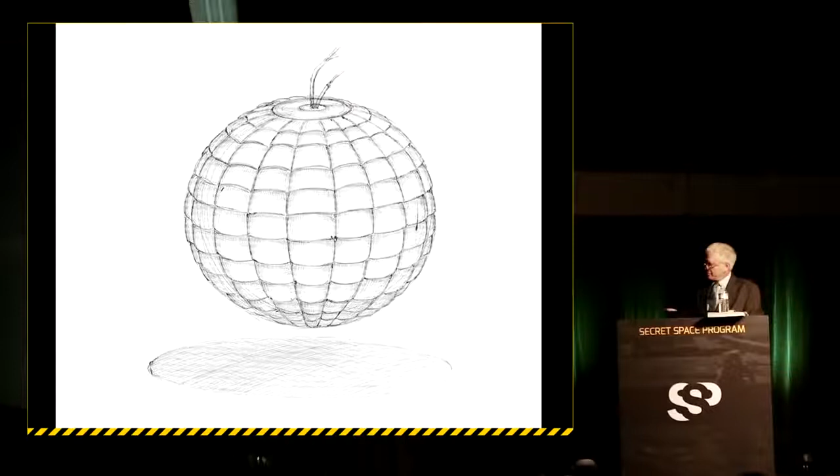Anyway, one of the things I like to do in closing is this is the young man who produced the film that you'll probably have a chance to see later on, James Allen. He's passed away now. And this was literally just a month before the film was being released. He suddenly became very sick, was in the hospital. He died within 2.5 months.

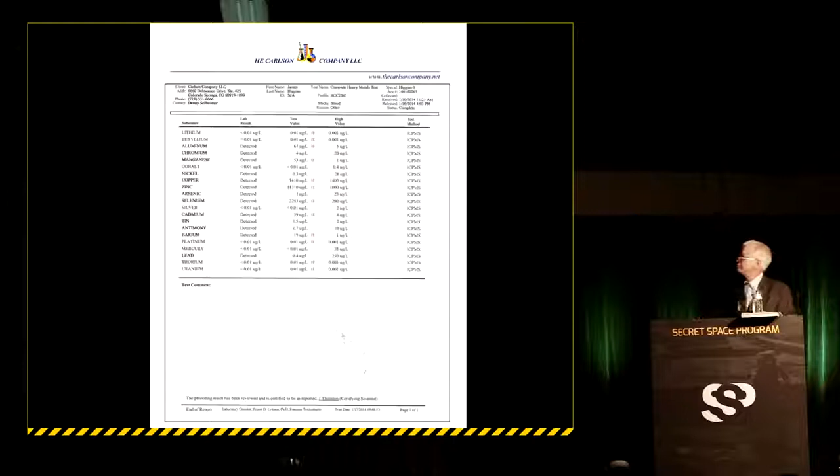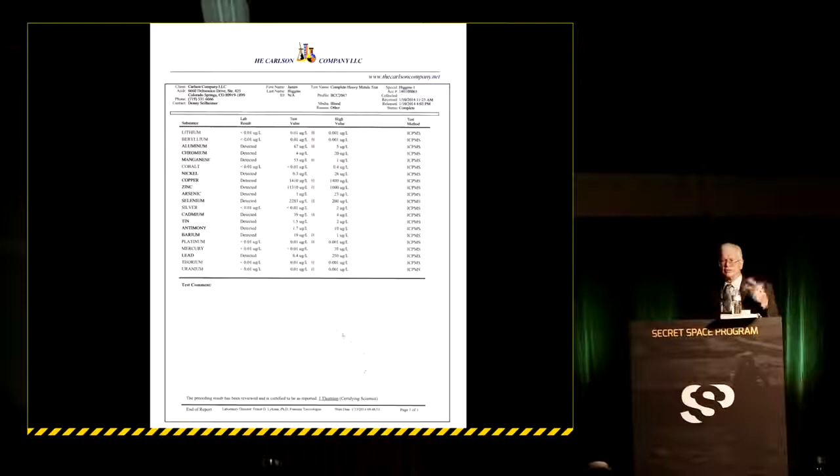And so I'd like to dedicate this presentation to the memory of my friend James Allen. He's a brilliant young man, had a great potential as a filmmaker ahead of him, and I thank him for the time that he dedicated to documenting what I did.

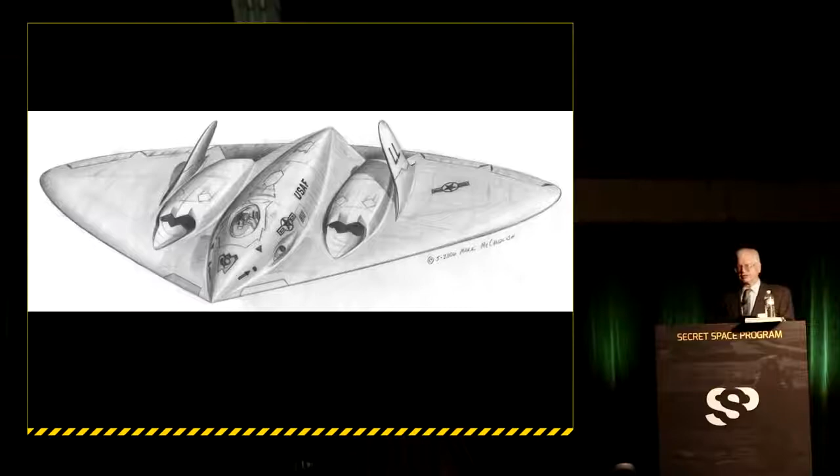Now, some of the programs that I began to hear about that had to do with this enhanced performance were aircraft that utilized a newer technology referred to as stealth. Now, stealth, one of the problems that you have when you're flying in...

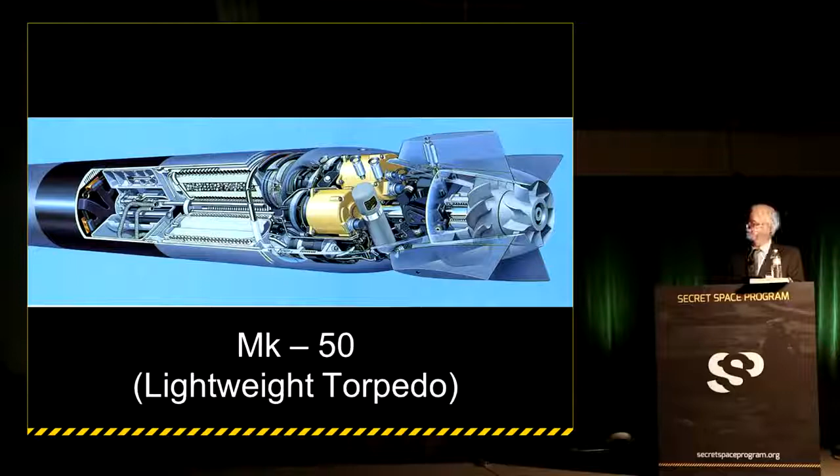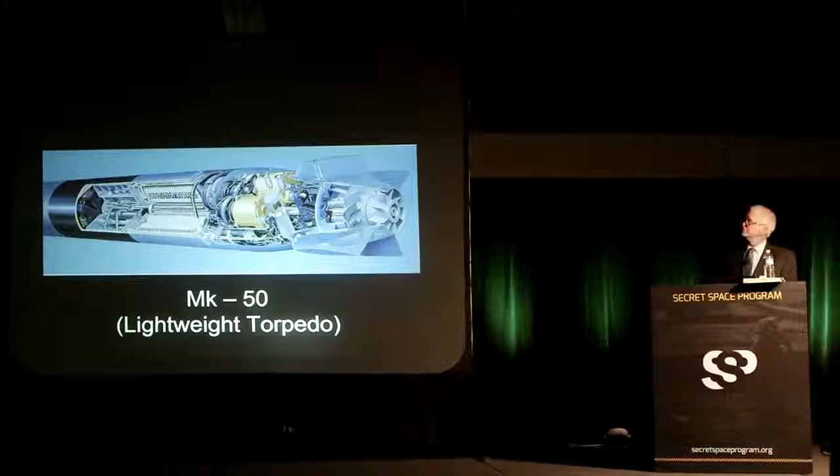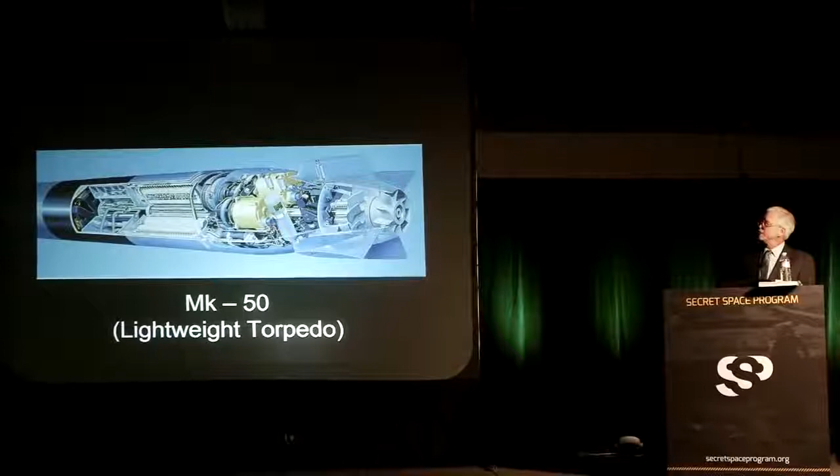And the college, and eventually began working in the defense industry. Spent a little time working in the special effects industry in Hollywood. And these are some of the paintings that I did. This is a cutaway illustration of a propulsion system for a lightweight torpedo that basically involves a lithium core that is ignited once it drops into the water, and this heats up an oxidizer, flows through here, it creates high temperature steam through these heat exchanging tubes, goes through a transmission, drives a generator, and also a couple of counter-rotating props in the back.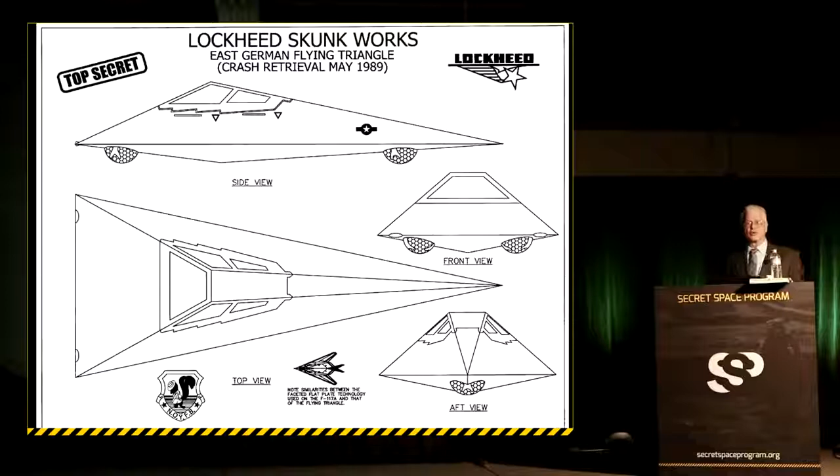Now, after I got out of high school, I realized that in order to go to the... Okay, there we go. Sorry about that.

One of the things I was going to need to be able to do in order to go to the college I wanted to go to, which was a place called Art Center College of Design in Pasadena. I wanted to design cars for General Motors, and this was the premier college that all the designers would go to. And at $2 an hour minimum wage at the time, I knew that there was simply no way that I could afford to save up the money to go there. So I decided to join the Air Force and get the GI Bill to help pay for my college education.